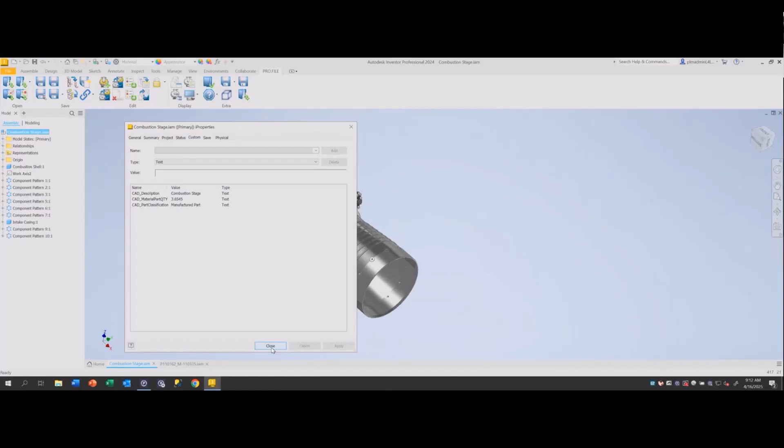So if, let's say I've got this design ready to save initially to the PLM system, I can go ahead and hit my save button. And what this will do is bring up the check-in wizard for my files.

And one of the things that we can handle as well is, you see we have a list of existing components that the system has found. So some of these standard parts like bolts and nuts, common components or library parts, which would be shared between many different assemblies, can be managed as well. And so what this is telling me is it's picking up these files as already being saved into the PLM system. So we're going to be able to utilize these and not create unnecessary duplicates of these standard parts.

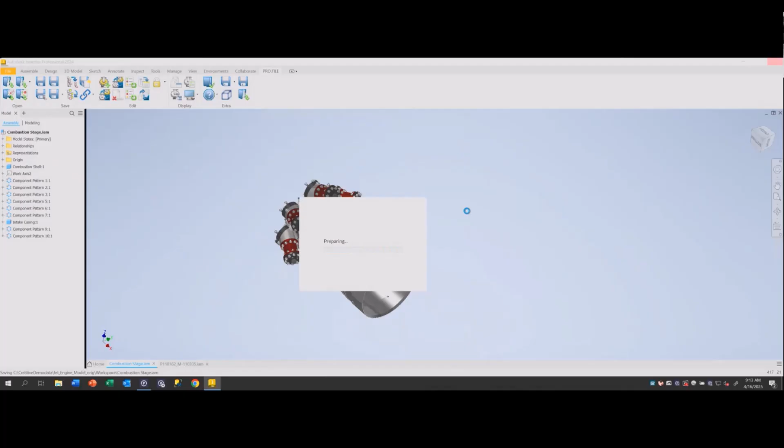So we'll hit OK, and the check-in wizard will come up. This wizard gives us a kind of a graphical view of what our file structure looks like for both parts and documents. And so we kind of have a summary of every component in this assembly, and we can kind of scroll through this list. You can see a thumbnail of each component.

The far left side of this screen, we want to see these green check marks because that's telling us that we have all of the data that we need mapped over. So there are required fields, of course, between CAD and PLM that need to be filled out. And so if I click on one of these and take a look at the actual part form, you can see that we have different fields that we're mapping over.

So if I go up to the top level assembly, we can see that this description field is coming over. We have a classification, so a classification field can be brought over. This allows us to create a list of different component types, different classification types for your different parts, which then allows us to add in additional metadata for each classification.

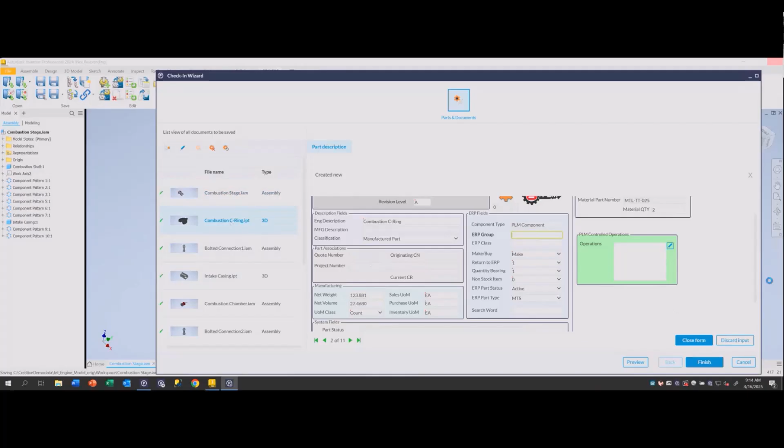We also, you can see, are bringing over some weight properties and volume properties from the CAD models. If I go on to one of the subcomponents, we can also see that we are bringing over material information. So for example, this combustion ring is titanium, it has this part number and this quantity.

You can see here that all of these parts currently do not have a part number, and we're going to utilize the PLM system to generate a part number for us. So this part number field will be auto-generated. In our out-of-the-box system, we have a 6-digit sequential number that gets used, but that can be adapted to any part numbering scheme that you may have. So it can support smart part numbering as well.

So I'm going to go ahead and hit finish. And what we'll do here is this is going to begin the saving process. So what's going on here behind the scenes? We've got local files that are being saved up into the PLM vault, both from the part record side of things as well as the actual CAD files, which will be saved into the vault. So both documents and parts are going to be saved, and we'll have these components with their linking structure come over, and we'll see that this is a multi-level bill of materials.

In addition to that, we'll have preview files generated for each one of these components, so that we can view a lightweight 3D model in the CAD or PLM system. This way, people that don't have a CAD license will be able to take a lightweight 3D view of these files as well.

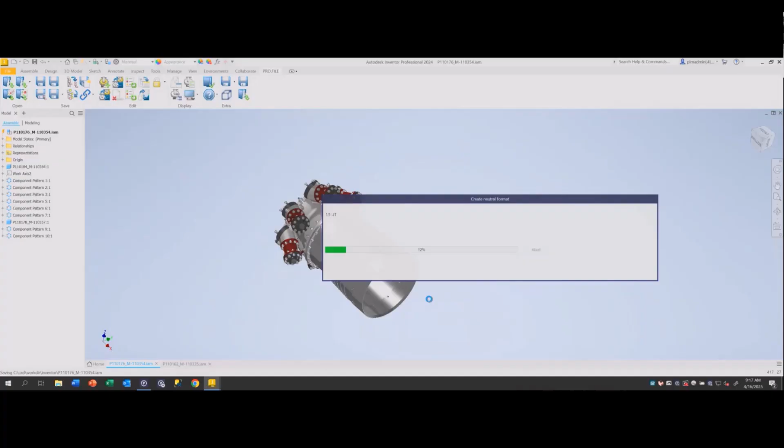You can have a configuration for automatically locking files when you open them, so that if a different user is trying to open a file and modify it, they wouldn't be able to do that until you unlock that file on your username.

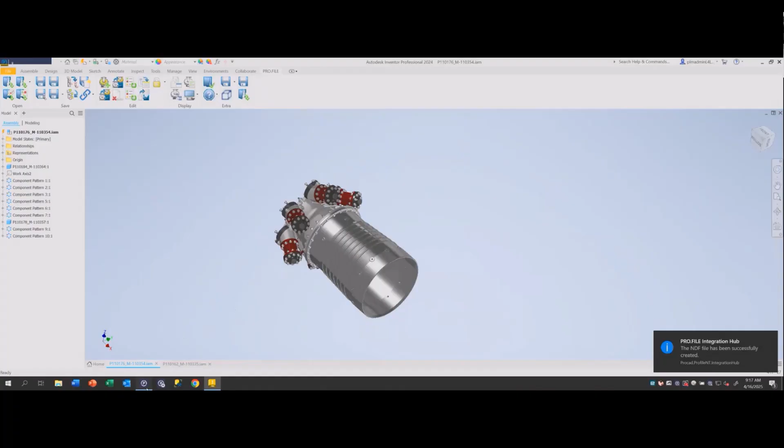So we've completed the check-in, and if we go over to the Pro.File system, we can view the structure of this assembly. Let's expand this up a little bit - we can see here's our part and document structure, and we've got our part components with the gear icons and the model files linked underneath each part record. So that's the structure, a parent-child structure.

We can also go to the BOM view, which is going to show us a true bill of material, multi-level view with level, position, and quantity values. You can see here, when we were checking in that file that had the material stock attached to it, here is that titanium stock that got attached, and that material is linked underneath the part record in the BOM.

You can see this BOM view - there are different views we can take for this BOM. These columns can be configured to show whatever data you'd like to see in your BOM. This is the standard out-of-the-box functionality here.

So if we step back a second, we've created the initial bill of materials with the design files attached to them, and then what we're going to do from here is go through a release process. Currently the status of these components is WIP, that's work in progress.

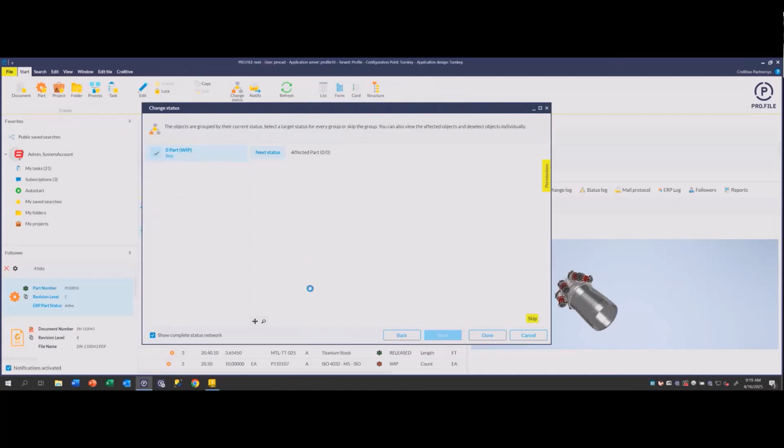This would be the status network for parts - it's a very simple status network in the out-of-the-box system. We just have WIP, review, and released.

When we're doing this status change top-down, we can select this review status, and we can go to this affected parts screen, and then we can see all of these components are going to be moved from WIP to review.

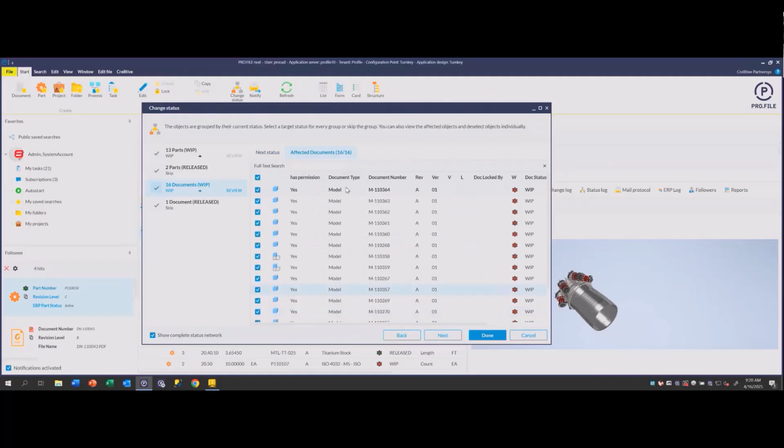Similar on the documents - for these documents, these are going to be the CAD files. We'll select review on these, and we can see a list of all the CAD files that are going to be moved from WIP to review.

Just another quick note on statuses - the statuses can be configured so that, for example, if parts are in a WIP status, we can have permissions tied to that status. So maybe only design engineers would be able to see parts in a WIP status.

Once they reach a release status, then it would be able to be viewed by other groups in manufacturing or purchasing. And the other thing is, when we do a status change, we're able to have notifications sent out via email. For example, on a part status change to review, we can have an email sent out to an individual or group of people to notify them that status has changed.

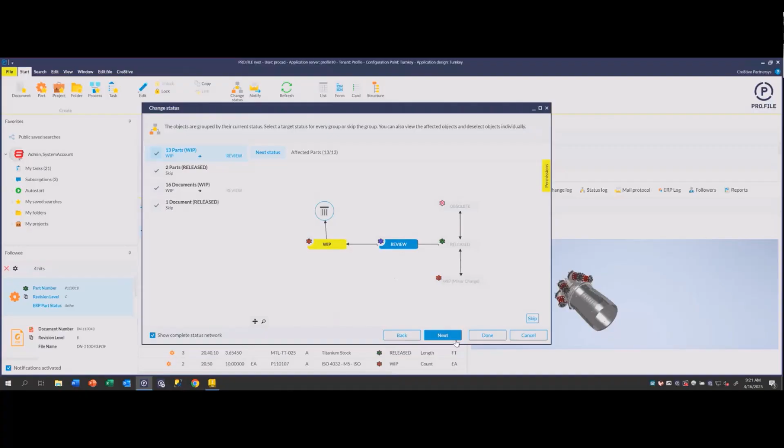So I'm just going to hit done here, and then we're going to move these to the review status, and we can see that updated here in our tree, in our BOM, and then also in our structure view with all of our documents.

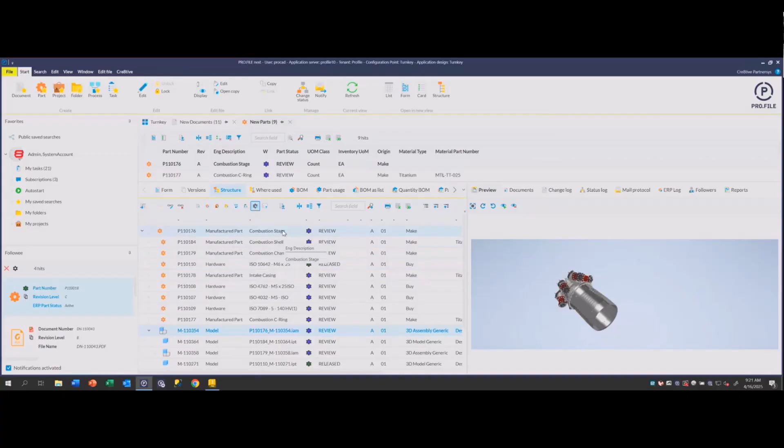Okay, so that's our first use case, just saving initial design components and then moving them through the release process. The other use case we wanted to cover with the CAD integration is, let's say we had a component that already exists in CAD, and we've released this out already into production, and this is maybe a template of an assembly that we use a lot.

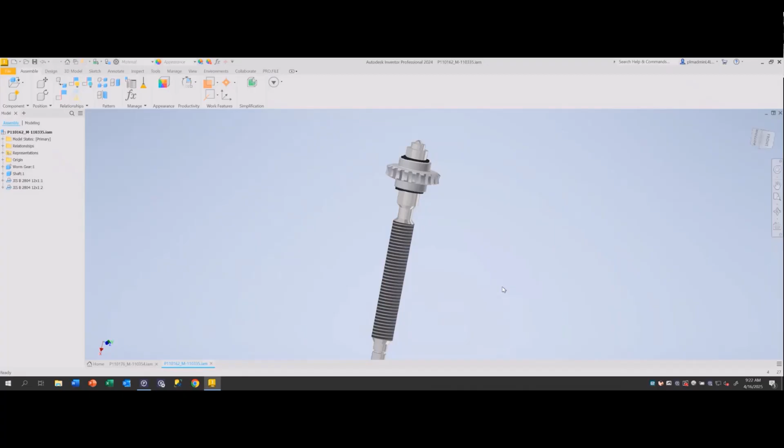We have a custom order that's coming in, and we need to reuse the components that are common to this assembly, and we're just going to change one component and swap it out to meet the needs of this customer for this custom order.

So for this assembly, we have this ball screw shaft assembly. This is our component, and this is a simple bill of material, but what we want to be able to do is show how we can do a reuse of this when we swap out a component. For example, this shaft here, we want to have a different length on this thread length.

So we want to modify the thread length on this, but reuse the other components. So let's go ahead and do that. We can do our design change here quickly in CAD and just show how this would work.

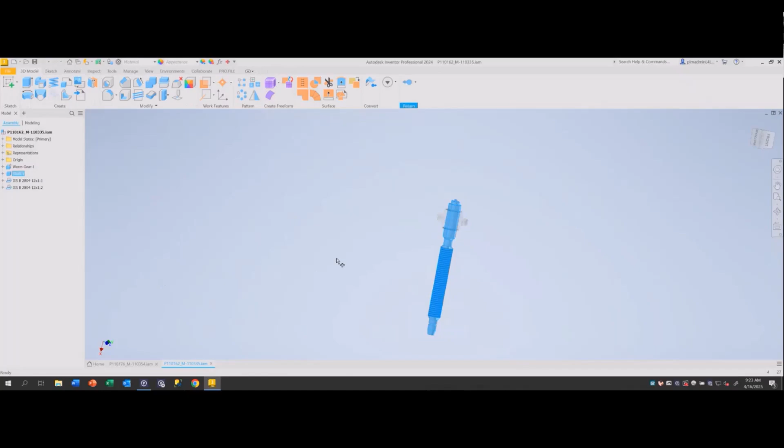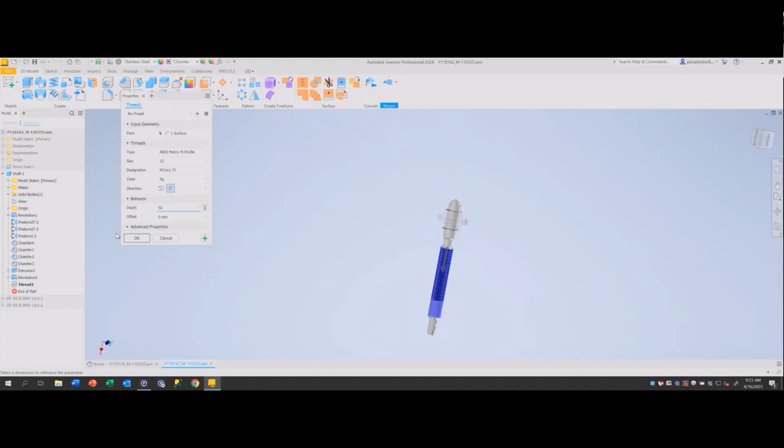So again, these files are all released at the moment, so we're doing a change on a released component, and that's going to bring us the ability to make a new BOM from that. So I'm going to change the length of this thread to 50 millimeters, and we'll hit OK, and we'll have our new component here.

And now what I can do with the CAD integration is I can utilize what's called managed copy. Managed copy allows me to take an existing BOM and then select the component that I want to swap out, or components, and create a new part record for that component.

So we can see here the system is telling me that this part here, this is the shaft that we modified, and it's picking up that this has been modified for me in this window. And also the top level assembly, we're going to make a new record for that as well. So we're going to create two new parts and then reuse these existing parts from the original assembly.

So as we go through this, we can hit OK. The part numbering scheme that we have is going to take care of the new part name here, so it doesn't really matter what I put in this situation. I just used a -1, but this will be renumbered and renamed through our part numbering functionality.

We can put in just a quick description. Maybe this is for a specific customer, maybe this is for Boeing, and on the actual shaft itself, we could put in, this is 50 millimeter length. So we'll have that information in our description.

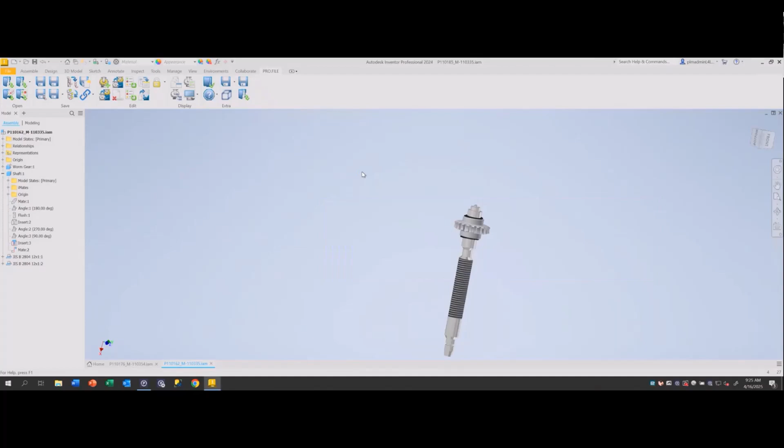And now again, this will go ahead and create our new BOM for us and run through the same process we just showed for the new part, but this will have two new components.

We're going to unlock these files, and then we will be able to see the new bill of material that we just created. So here we go on the new file, this rear ball screw shaft assembly Boeing. We can see that we have both the part records and the CAD files, we have our new components here at a WIP status, and then we're reusing the components that were there previously.

These are still at a release status. So that's just a quick use case of how you can utilize managed copy to reuse existing part numbers and not create unnecessary part numbers in the system, and have a quicker way to generate your design files.

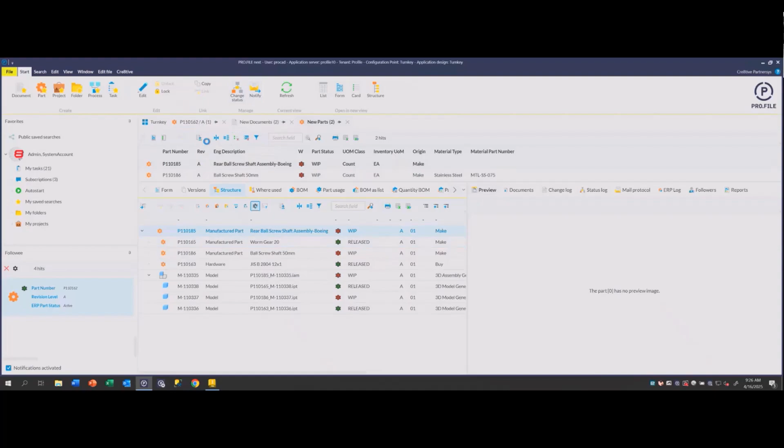Okay, so next we're going to shift gears to a different use case. This is going to be utilizing Microsoft Excel integration with Pro.File. We have integrations to all of the MS Office software, so Word, Excel, PowerPoint, OneNote also.

The use case we want to go through here is, let's say we are receiving a problem report from somebody on the shop floor, someone who doesn't have access to PLM. Maybe we received this through email and we have this Excel file stored locally on our system. What we can do is utilize the Excel integration to map these fields on this problem report over into a document form directly inside of PLM, populating the document record as an electronic form.

So for this use case, we've got a problem report submitted by shop floor, normal priority. The summary is that we have poor surface finish on the combustion stage intake casing, found in manufacturing. We do have the ability to put in a potential solution here where maybe the shop floor user was saying there's a grinding operation that needs to be looked at, maybe some excessive tool wear.

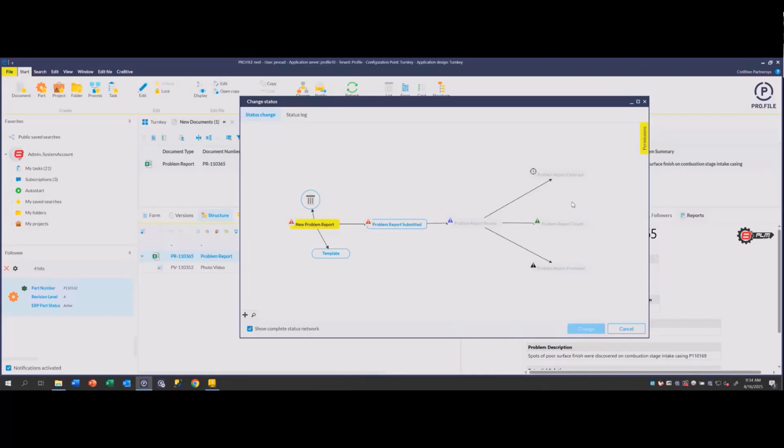I can go to a different document type, maybe a specification. I can show you here, we have some of these. This is a standard list of out-of-the-box document types that comes with the system, but these can all be configured and added based on your use cases.

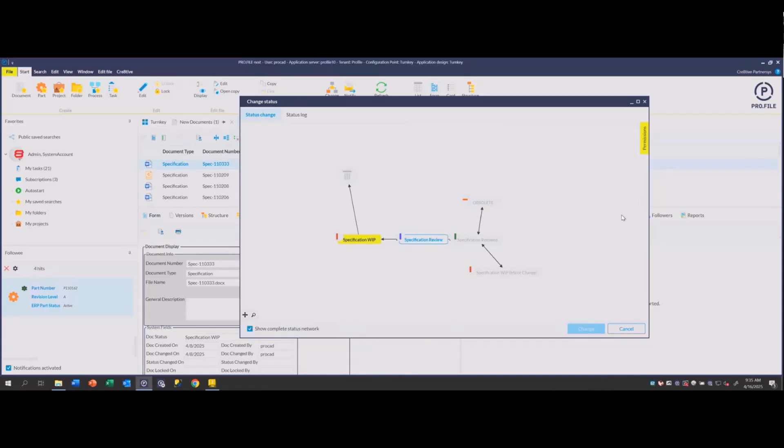But if I go to the specification document type and look at its status network, I can see that it's different as well. So we can have these unique status networks based on document type, which give you more control over your document release process as you need it to behave for different document types in your system.

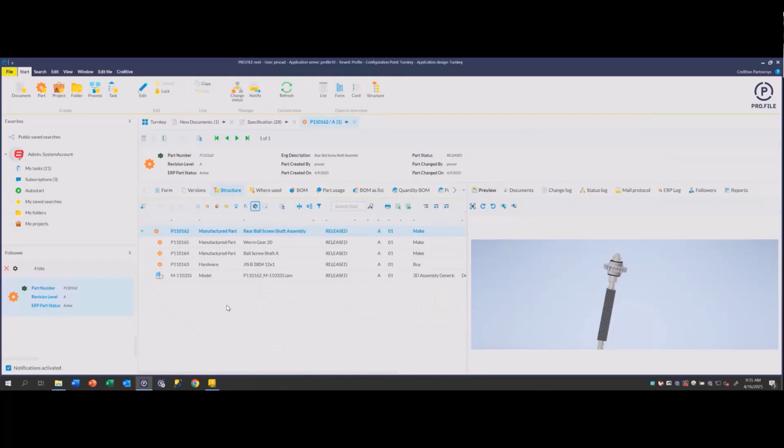The other last thing I wanted to show is, we had this image of this CAD file here and showed some static images. I wanted to also show that for model files, we do have the ability to have 3D renderings in the system. This is a lightweight 3D image of the shaft assembly we were looking at when we did the managed copy.

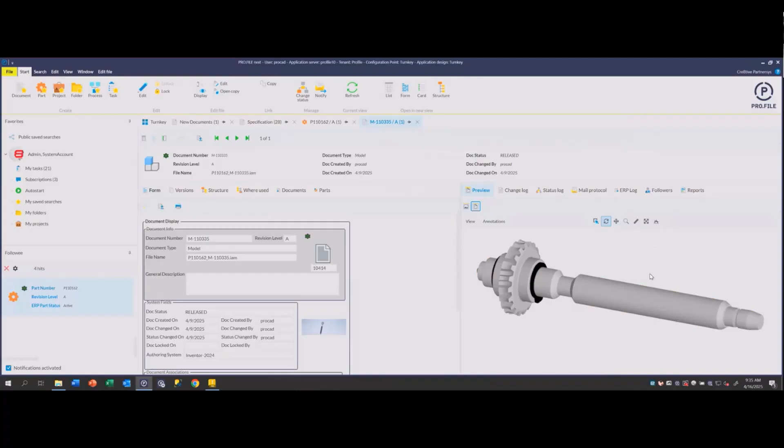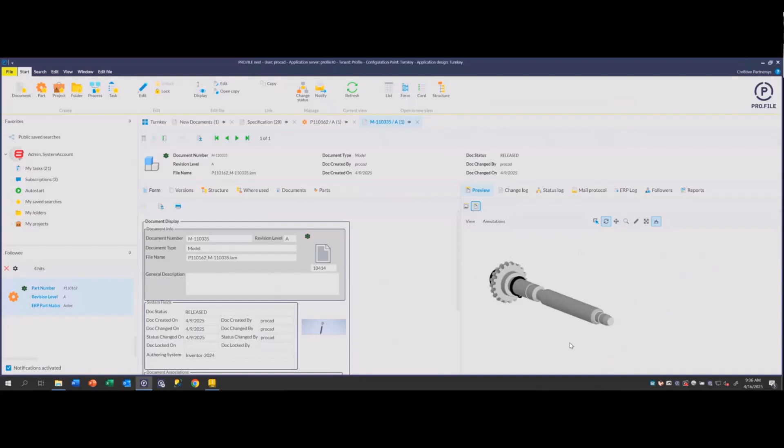Within the Pro.File preview tab here, I can actually explode this out and see what these components are. I can hover over these and see the part name on each one. There is some lightweight measurement capability in here, but the main thing is I don't need a CAD seat to view this—I can view it in a lightweight form directly in the PLM system.